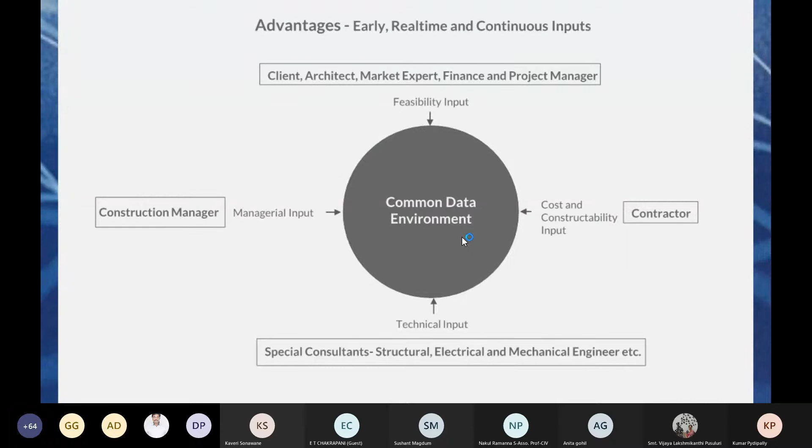Every minute is very important, every hour is very important, and we have to go through this in a fast-paced society. Even construction has to catch up to this, and that's the reason you have everyone giving their inputs, and you have a better outcome of the construction.

So this is a kind of graphical representation of what we were talking about till now. In traditional workflow, you have the pre-design, schematic design, design development, and then construction documents which are prepared, then distributed to different stakeholders, and then you have different buyouts, which in turn starts the construction and closes out the whole project.

When compared to the BIM integrated approach, at the conceptual level you have all agencies right there helping each and every stakeholder, giving their inputs right at the design stage, where you have a criteria design, detailed design, so that even from the design stage, you have inputs from all stakeholders, and these are implemented in the design without any rework.

And then you have implementation documents rather than construction documents. You have shop drawings, or basically the ones which are used directly for fabrication and brought into the site. We can go to that extent and use this to the fullest, and then you have less time spent explaining the project to different stakeholders, and construction is done very quickly because everyone knows what happened during the design phase, and it is being closed out very quickly.

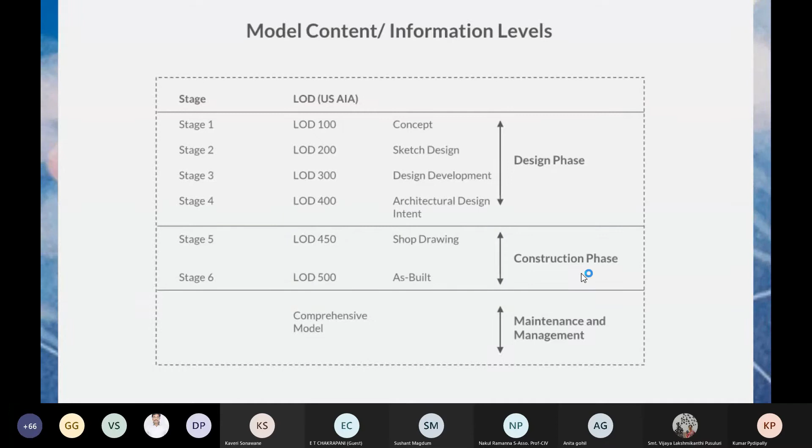So we did a project in Hyderabad. This is done in ArchiCAD. It's a duplex house with a pitched roof, but apart from the design, we took that ArchiCAD model into Revit and added MEP services. This design was also for a structural engineer, so he gave his inputs as well. So this was a totally coordinated model which we did.

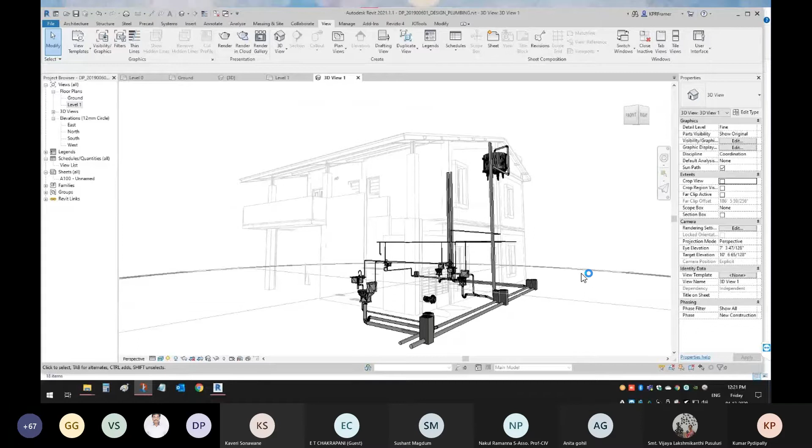And the construction for that was very quick. So what we do, when we get a project, as soon as we get it, the first thing we do is add a project site location.

What this does for a model is, in many tools like Revit, ArchiCAD, or Bentley, as soon as you give a location, the software in the backend gets the weather data information of that location, and then you can start doing solar analysis and energy analysis just from the basic site location information.

And the best part is, once you create the model, it also has embedded latitude and longitude information. So everyone knows with GPS tracking which element goes to which part of the building, and it's easier now, apart from using grid locations at the site, to directly use GPS to track where each constructional element goes.

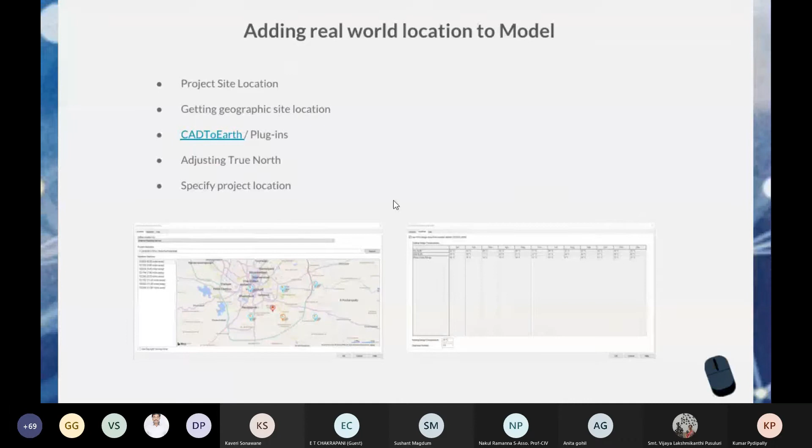So there is no longer a need for creating mass models just to explain neighboring site situations for the designer. Once you have all this information, you of course have to give the true north and specify the project location perfectly, and then you have a model which can give a correct, detailed analysis.

So I want to take a step back and explain this data in a BIM model. What we did here is take a 10 feet by 10 feet wall, 6-inch wall, which is modeled in 3 different software.

This is from AutoCAD. The one which is being selected, which is in blue now, is from AutoCAD. The one to the left is from SketchUp, and one more to the left, the last one, is Revit.

So we are using the Navisworks interface to see what information is embedded in it. Basically, this is the CAD model. You can see the CAD wall drawing file, and as soon as I select it, it shows it's a 3D solid. But in the properties, I just have three different tabs, which give different information about that specific element created in CAD. You can see it tells me which layer it's in, what the file name is, and what the material is.

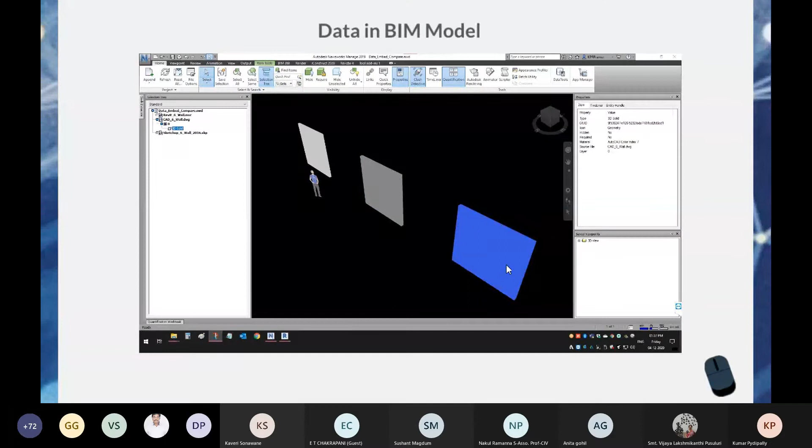Then we have SketchUp. The whole concept of SketchUp is that it does modeling using surfaces, right? So if you compare this to how an AutoCAD file is being selected, the whole object is selected, whereas when we click on the SketchUp one, it just selects one surface, and that's how SketchUp models it.

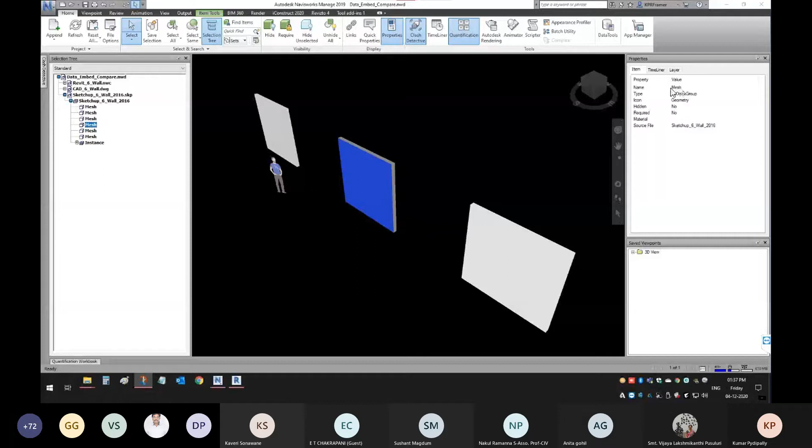Even in the selection tree on the left, you can see that SketchUp has one 6-inch wall, which is made up of 6 meshes because of the 6 faces, and each face is embedded with this information. So it just tells the source file name, and it says it is a geometry of mesh type, and that's pretty much the information we are gathering from just the SketchUp file.

So what we did is just use the native software and created these models. That's all we did. Now we are talking about Revit.

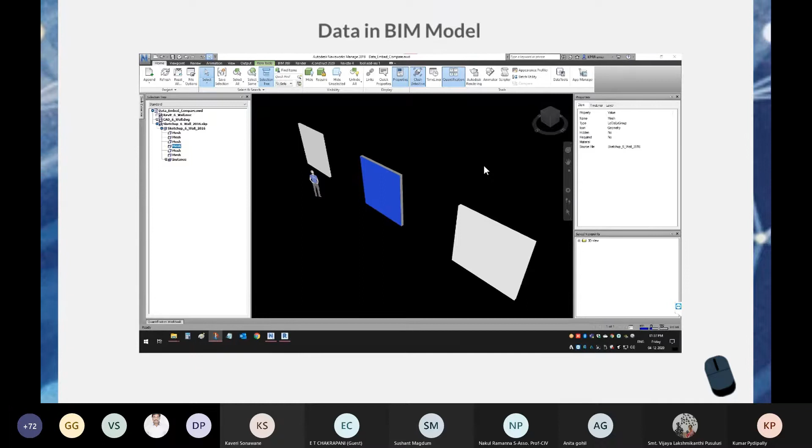Just by using basic Revit, we created this. Do you remember those 3 walls? These are those same 3 walls, but the properties extracted from a single element span many tabs, and it actually goes on further. So I just wanted to show the element properties which it gathered.

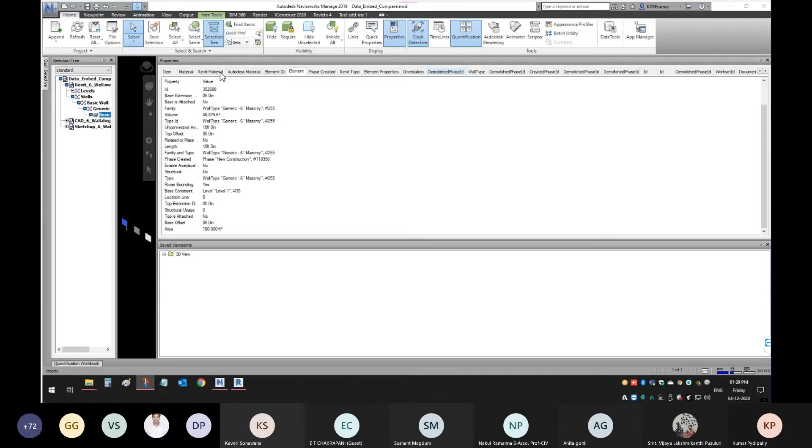Even in the selection tree, it shows it is a wall of generic type, a basic wall. But in properties, you can see it showing the wall type, the volume it has, and that the unconnected height is 10 feet.

Its length is 10 feet. It is at level 1, telling which level it is on. It is telling the area of it. It is telling if it has a base offset.

So you can understand the amount of information or data which is embedded in one small wall. It is just a wall which was drawn, and we just saved it. We did not do anything else, and this is all the information it embeds in that model. So you see how a small wall has so much information.

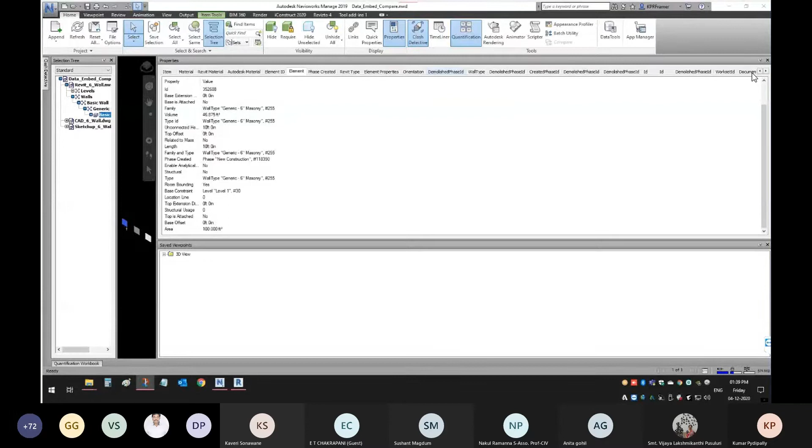Then you can take it further and understand how much information can be embedded in a BIM model for different elements in construction. Apart from just a wall, each and every element will have all this information, specific for its construction. That's why we say a BIM model is successful when, just using the model, not even the drawings, it can be constructed on site.

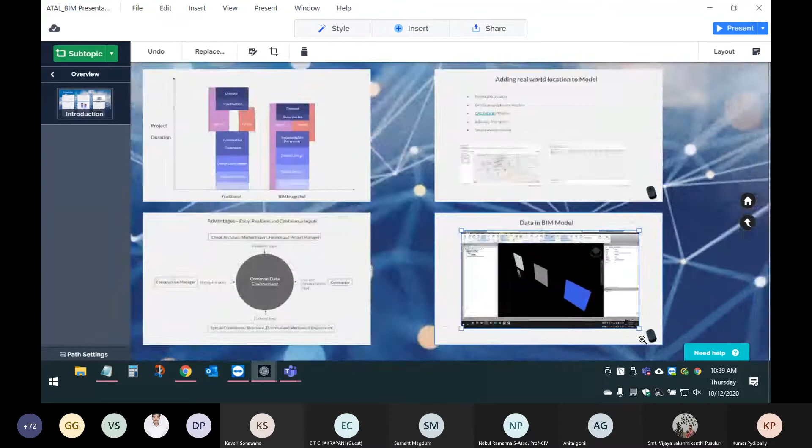We have a small video which was done by one of our students, which gives a clear picture of what BIM is. So I'm just going to show that now.

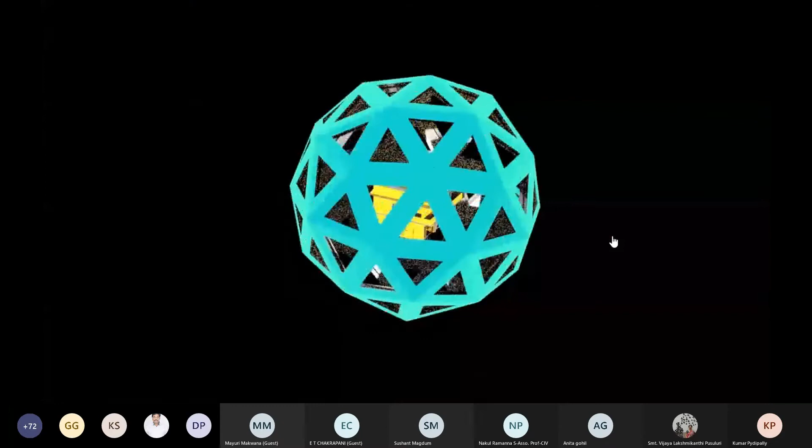There was a loop in the audio, that's why I had to mute myself. I don't know if you got the audio from the video which was shown, but can someone confirm if you could hear anything while the visual was going on?

There was no music or anything playing, but the video was fine. Oh okay, well I thought everyone was able to hear the audio. Okay, I will share the video. There is a YouTube link, I'll share the audio for that.

But basically, it explains what we discussed till now, where you have different consultants giving their inputs to the design, and different stakeholders cross-checking what was being decided, and finally you have an outcome of that.

So my presentation will be jumping between the PPT as well as the hands-on session, so that you can see whatever I've been talking about. I want to jump to a screen which basically shows the data embedded in a different file. So I'm just going to start up Navisworks.

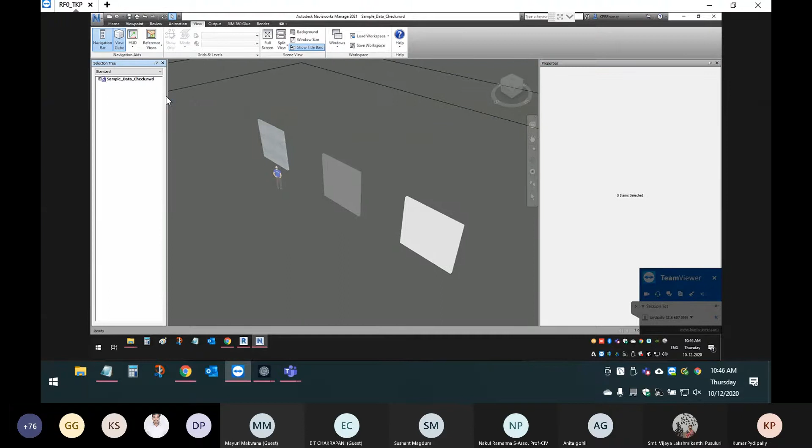So as soon as I select the file from AutoCAD, you see it is showing me what is being selected, and these are all the other tabs of information which it is basically giving out, which I showed in the presentation.

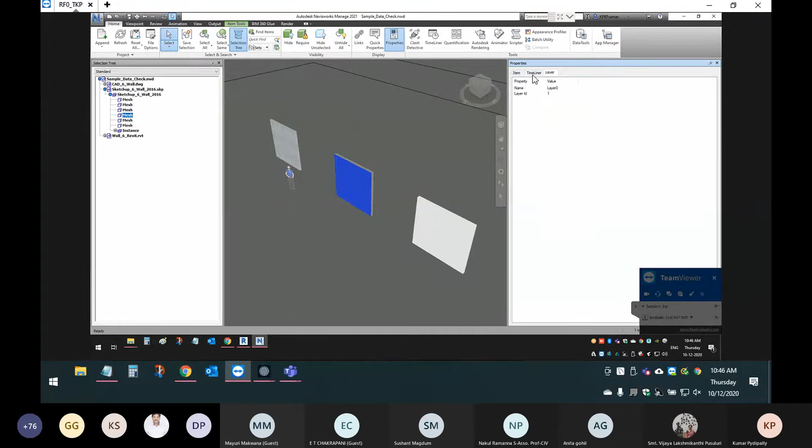The next one is from SketchUp. You have the same mesh, but apart from that, this is the information which is coming out from the native SketchUp file. And then we have Revit.

So as I was showing in the presentation, okay one second, let me just reset it. Okay, so you see from this, you have all this information which is embedded in just a simple wall.

Apart from the element which I already showed in the presentation, I just wanted to go over what all other tab information it has embedded in it.

So it has the element ID, it has the Autodesk material which is being applied, masonry, CMU material. Then we have what kind of Revit material is being applied on this, all the different properties of that.

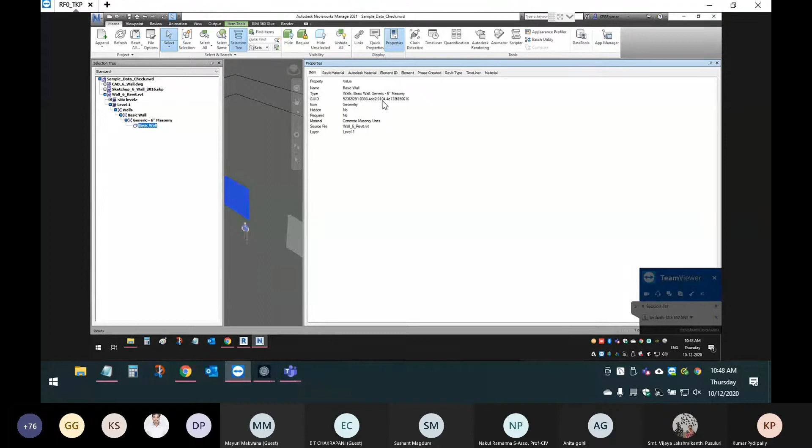You have item properties, what wall it is, what is the globally unique identifier. This is all to select it uniquely.

Then we have phase created. So Revit has different phases. So if it is like a demolition phase or a new construction or a renovation, those kind of things, it also has that information in it.

Then what are the type parameters which are there in that specific wall, and if we have added any timelines, you can also see that information. And finally the material again.

So you see just a simple wall from Revit has this much information embedded in it compared to the other software. So definitely it adds more value, but at the same time it also equals how much investment you're putting to get that software, right?

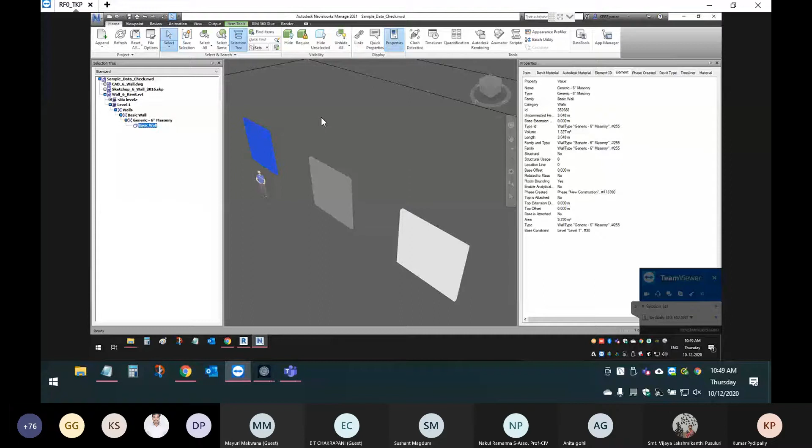So not all stakeholders can get their hands on these softwares, or they have a cheaper alternative. That's when you have the interoperability option, which started off in BIM, where different stakeholders can work in their native tools and then send that information.

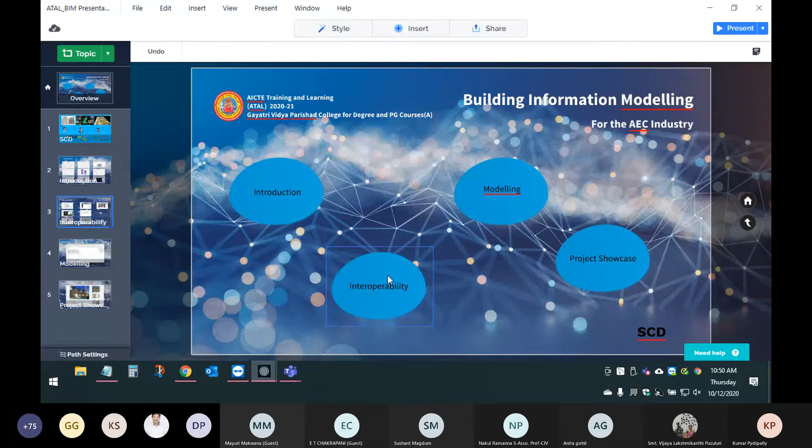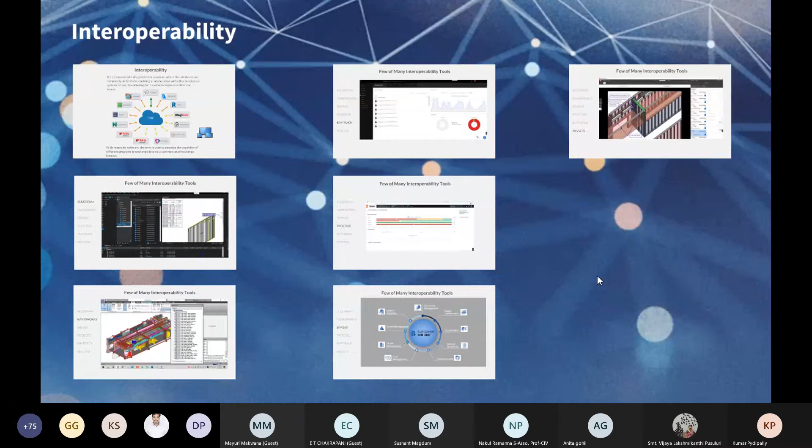So that it is hosted on a single server which everyone can see. I'll come back to the presentation. Interoperability - what this term basically means is what I just explained. So everyone can work in their own environment, whichever they are used to, and host these files onto a common data environment where collaboration is very easy.

And irrespective of which screen you're seeing it from, be it Mac, PC, phone, tablet, it gives the same functionality for everyone, where all can interact and give their inputs then and there, and you can get this whole information exchange in this environment. There are different tools which have these features.

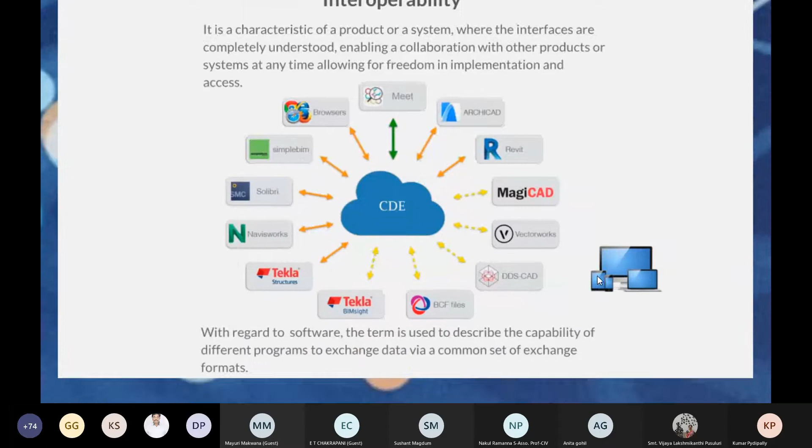I'll be showing a few which we are using in-house, and we have been using in our company. So the first one I'll be showing is Bluebeam.

Bluebeam by itself is basically like a PDF viewer, Bluebeam Review - that's the name of the software. But it is developed for the construction industry, because most of our files are really huge, and the time it takes to open these files takes a lot of time, and you don't want to waste time.

So this software, even though Adobe is the conventional software which actually created PDFs, what we saw when we were using this is it is much faster when we use Bluebeam by itself just to open PDFs.

Apart from just the PDF functionality, it has something called Studio, Bluebeam Studio, which is a repository of all the PDFs at one location where everyone can access and give their inputs in real time, and the said person will get a notification that so and so has been changed or some comment has been added.

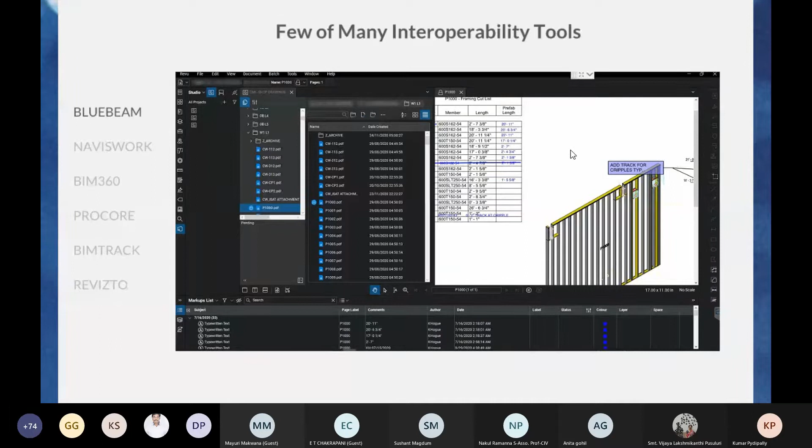So let me just pull that up in my system.

So it was offline as soon as I opened it, that's why you had that big logo of Studio. But I just clicked over here when it became online, so it just logged in as my user. And these are the two... let's see, yeah, these are the two projects which are going on currently.

Actually, MPK 21 is already done, but we still have access to those files. Basically, this is like a centralized location for everyone to upload PDFs, a 2D interoperability where everyone has their drawings at one location and everyone knows if there's an RFI or anything changed.

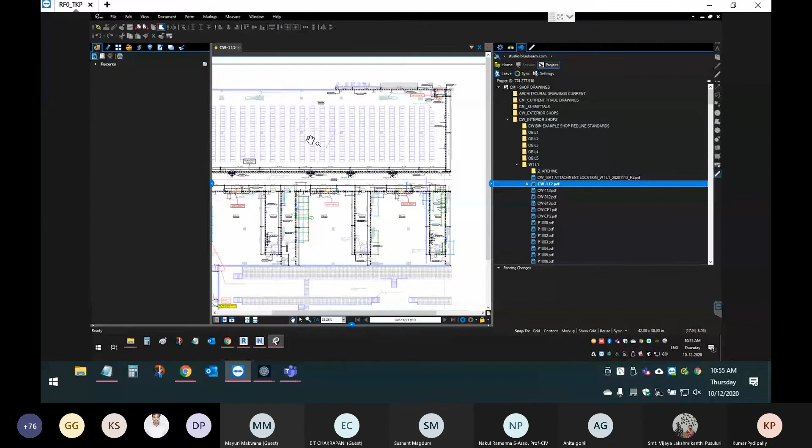So let me just open any one file, doesn't matter which. So this is a project, we will be talking about this when we are doing project overview. But so this is the plan, and we are the drywall consultants for this project, so we have to make sure all walls have been built correctly.

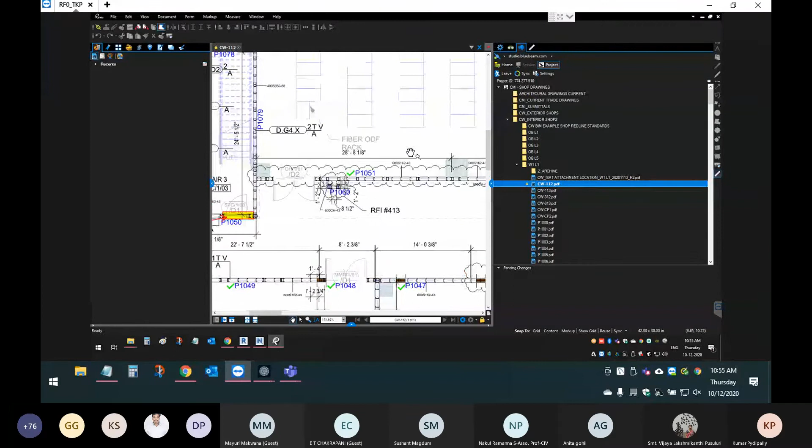Since this is metal stud construction, what we do is we populate all metal studs for each wall according to the openings or the heights of these walls. We create openings, we have jambs, headers for the openings. So each wall, apart from showing its location in the floor plan key plan like this, we do have its panel elevation. That specific wall will look like this inside with all the studs.

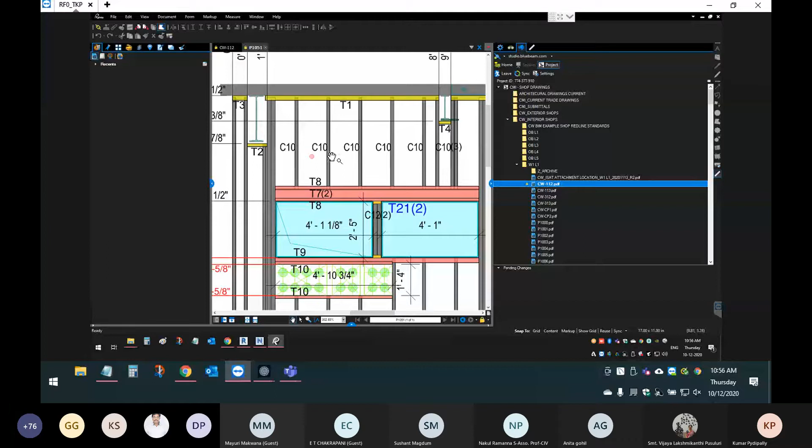So you see there are specific tags for each stud. Each stud, and inside the field, the manager will have iPads, and all they need to do is just click and they can come to this screen. They have QR codes where they can scan this in their phone and get this. The way it is being done on site right now is they have this panel, so-and-so panel is at that location according to the key plan. As soon as they get that number, they just scan this to get the quantities.

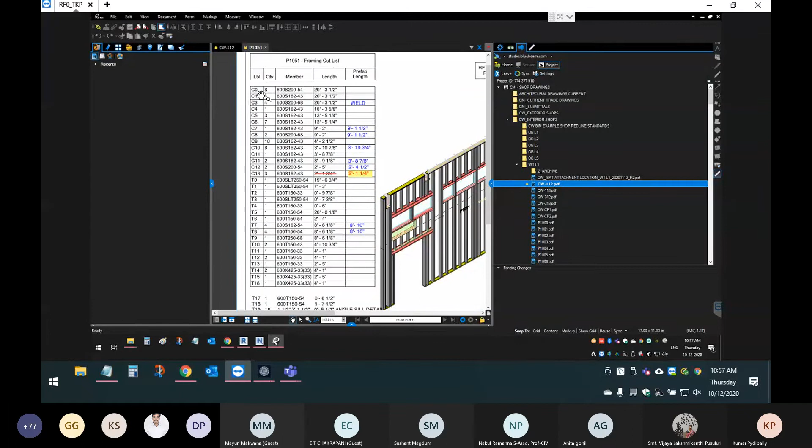You see all these are extracted directly from the model, and they get all C0s which are of type 8, this type of stud, has this much length. So they know exactly what is the quantity required to build this whole wall.

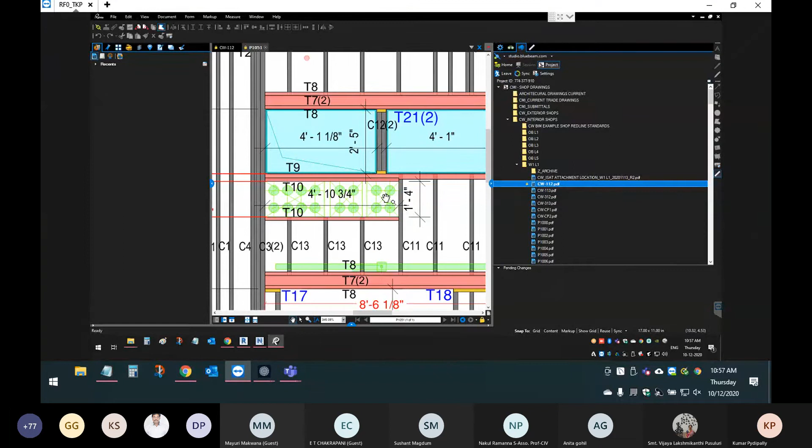They also know what are the openings. So if you see, all the trade files have been grayed out, and this is a duct, this is a cable tray or a pipe which is going through there. There is a light right above the door. Then we have different ducts going through the whole wall at that location. You have different other wall-hosted trades at that location.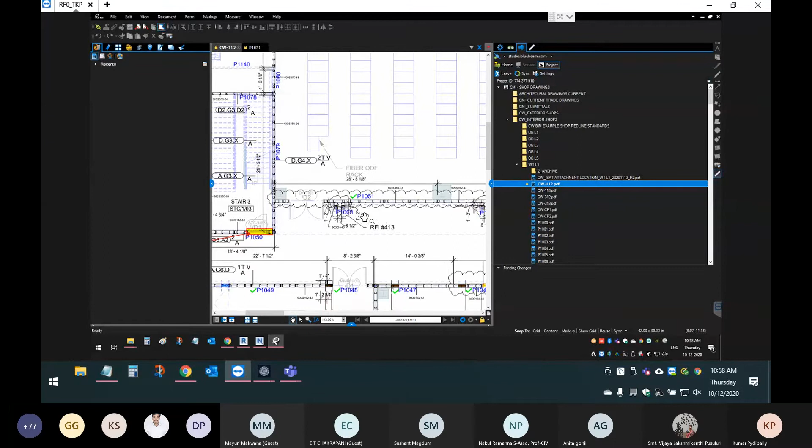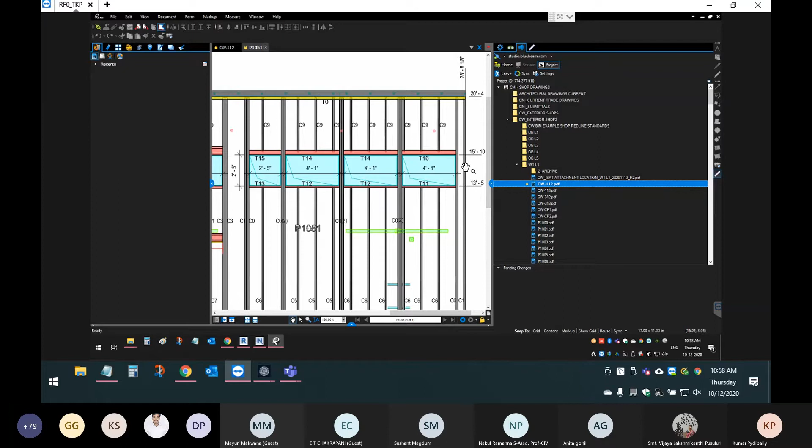So pretty much just by seeing these on their iPads, the field knows what's happening and why things are happening the way they are. They can correlate, and if there is any discrepancy between the locations of the said trade, they can mark it up, and then we can update the model then and there. Also, they can just make a mark and send it to the trade, so the trade also knows what's happening on site as they are building, right?

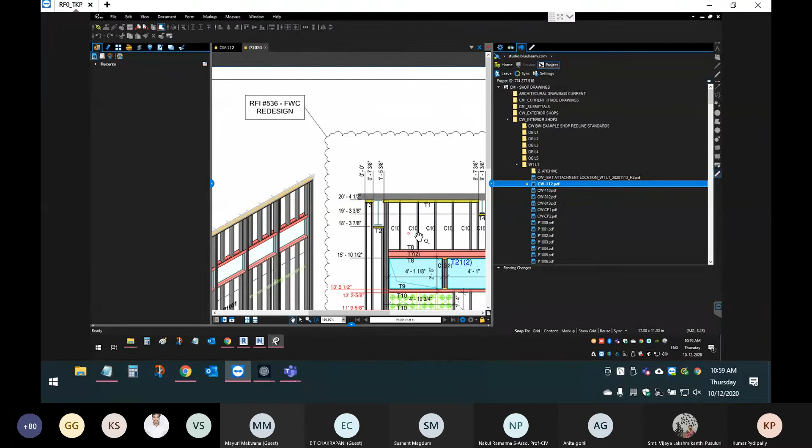So this is like a repository of 2D information, but what takes it further is your ability to add what has been affecting this specific panel. So what happened was, in this project, you have a corridor wall. Let me just jump back to the floor plan. So we have a corridor wall, and for some unknown reason, the cable tray could not be hung from the slab.

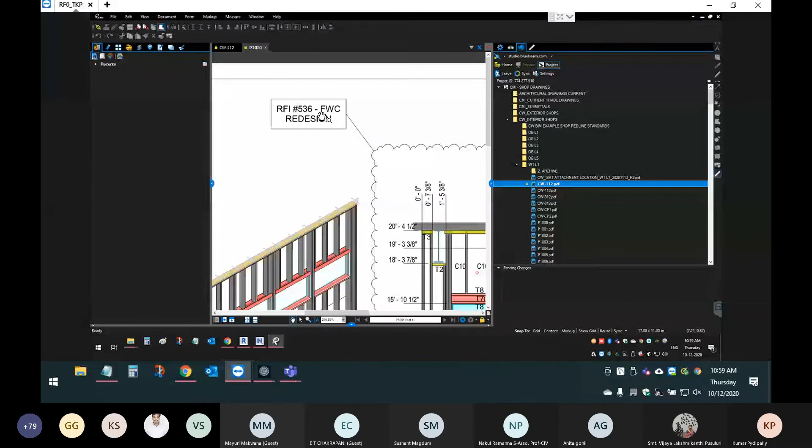So what they wanted to do is host it from the wall. So suddenly this wall had to be beefed up to take that load, right? So there is an RFI which states that, so we know this specific RFI to refer to when they are constructing this, and these are all real time.

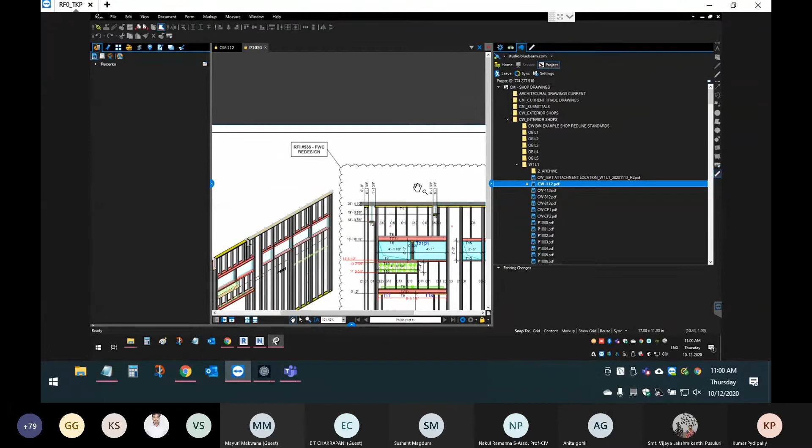As we update the model and then upload it, they have the latest file. The field has the latest file within an hour from what we do. So as soon as we print and upload, they have the latest information, and it is being reflected on site for the field manager to work on. So, very informative, very good use of 2D repository for getting interoperability between different trades.

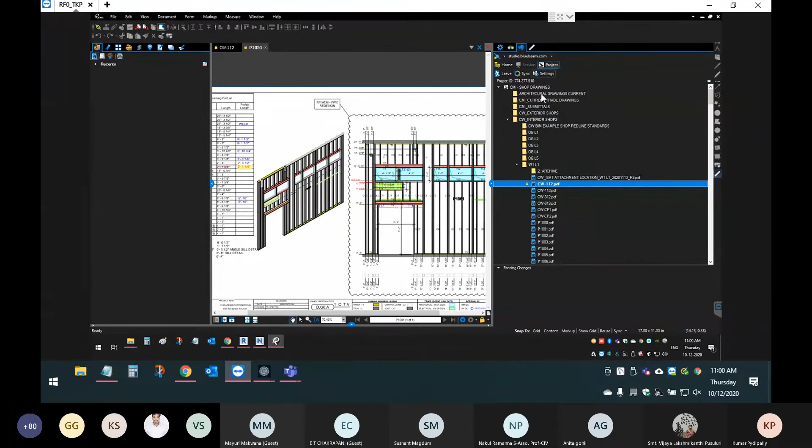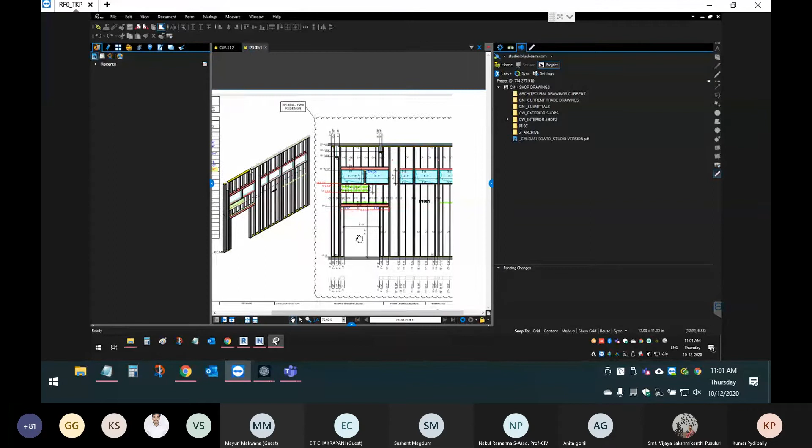Of course, I'm just showing you what we did. There are different trade elements which we might have access to or not, it all depends on how much access has been given to us. So I will basically show what I can show, or what I'm allowed to show. Since this is our work, I can show this specific thing. So this is basically the 2D interoperability, you can say. I'll just close these.

Okay, then we have Navisworks. This has been widely used for clash detection and simulating the construction of how it is being done. As I said previously, Navisworks does a good job where it can bring in all the different models and overlap them and show the construction issues.

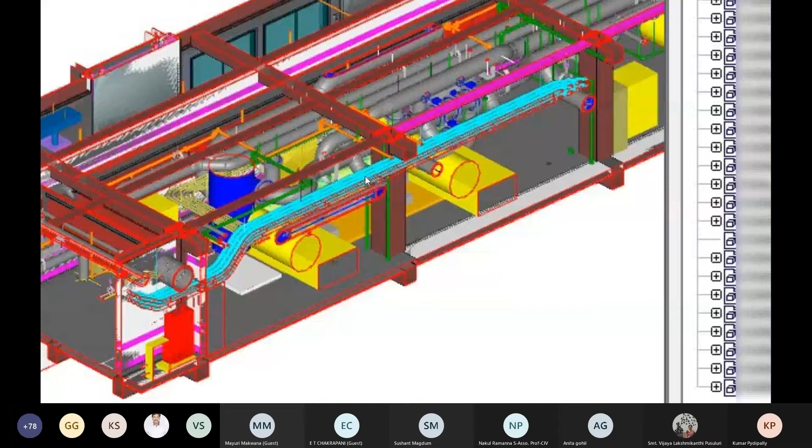And we can do the clash detection, where we can check the constructability. Each and every trade has an idea of what is happening. For example, the routing of pipes can be done beforehand, when they know what is being obstructed in their path, to reroute their overall route. So each and every trade has this information as soon as they start modeling, and we have these coordination meetings which are being conducted by the general contractor.

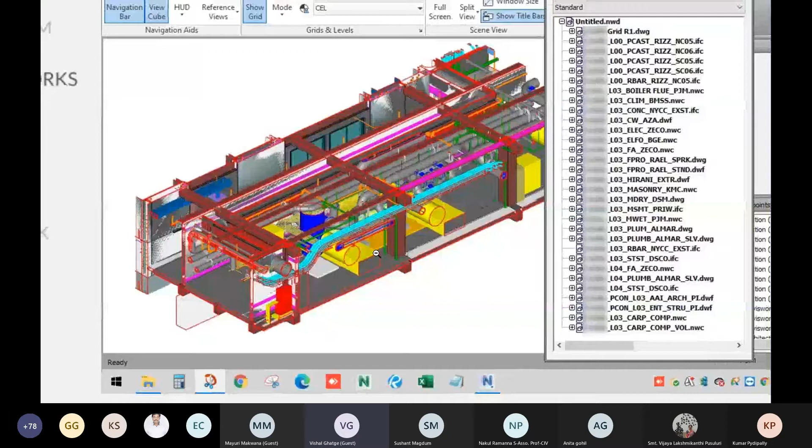Hello. Yes, sir, I have one question regarding Navisworks. While doing a clash detection test, among all the services, what is the sequence that clash detection should be? Means what was the sequence? If first one is the HVAC system, firefighting or something, I want that sequence, sir.

Priority, it's a good question. Yeah, sorry, it's a good question.

So the way it is being handled in our projects is we usually have a general contractor who does all the clashes between different trades. It is mostly like a cross product, so each and every trade's model is being clashed with all other models. So there is no set rule like first mechanical file is being clashed with all others, then structural.

Of course, in construction, I would say structural model will go first. Apart from the architect's design, you have the structural being the foremost for the building to stand. So usually structural clashes will be done first. Then it is done, actually not in a sequence, because everyone's model has its own importance.

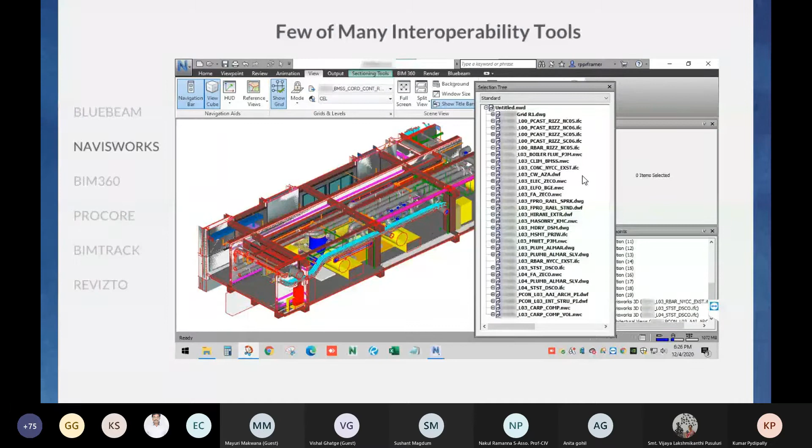Navisworks brings in all the different file types together and displays what's happening virtually on site. Usually these clash detections are done six months prior to construction, so when it's being built on site, everyone knows exactly what happens and follows that, minimizing time spent on field so they can focus on getting construction done within the given timeline. You know exactly where what clash is happening, so you can focus on construction rather than getting surprised by, say, a beam with more depth than shown in the drawings, which would cause rerouting and a big lag in the timeline. Those are all cut down.

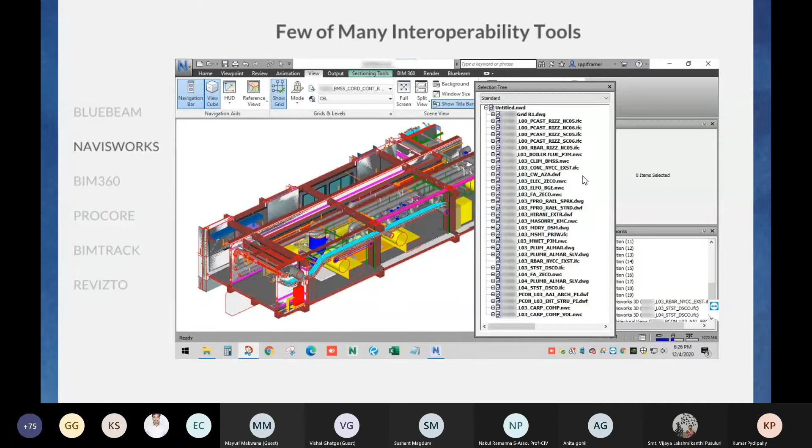I'm going to jump to a view in Navisworks where I want to show a similar instance of how we use it. One thing I do want to mention: Bluebeam, which I showed previously, is a server or cloud hosted thing. Currently Bluebeam is available only on iOS, not yet developed for Android, but it can be accessed via iPhone or your systems, and through any browser. If you have a browser, you can just open these files and check what's happening.

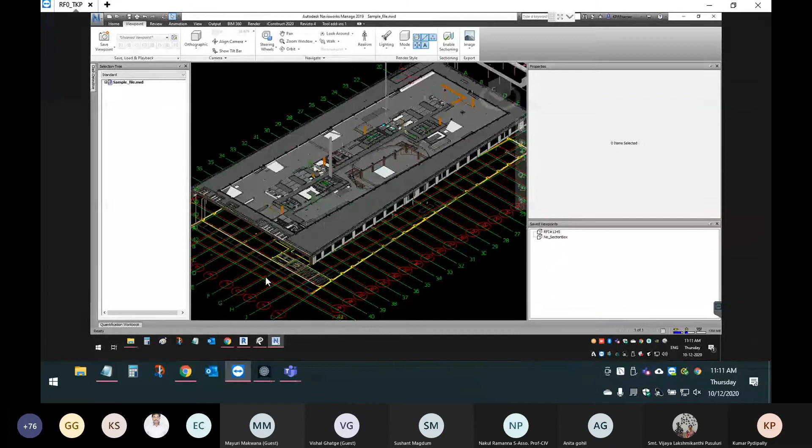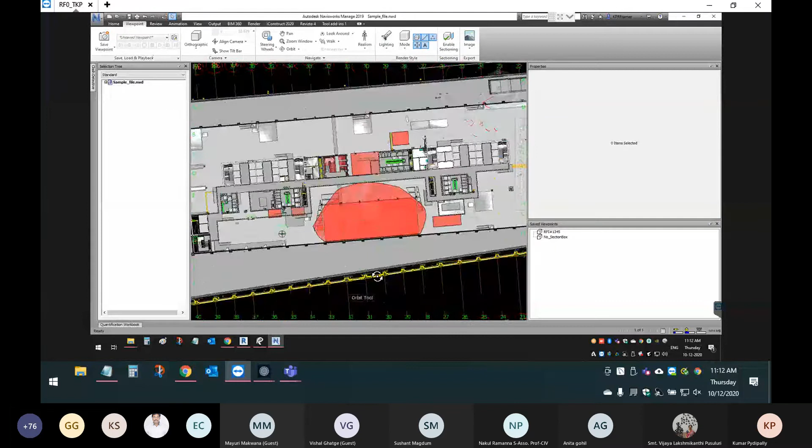Let me show you a sample Navisworks file. This has all these files embedded in it, and this is one level of a project we're currently working on. We have the grids, which are overlapped from an AutoCAD file and brought in, so at least you're not lost while roaming around in the model. In Navisworks we have these viewpoints, so if you want to talk about a specific issue and go directly to that location, you can create a viewpoint and discuss what's happening.

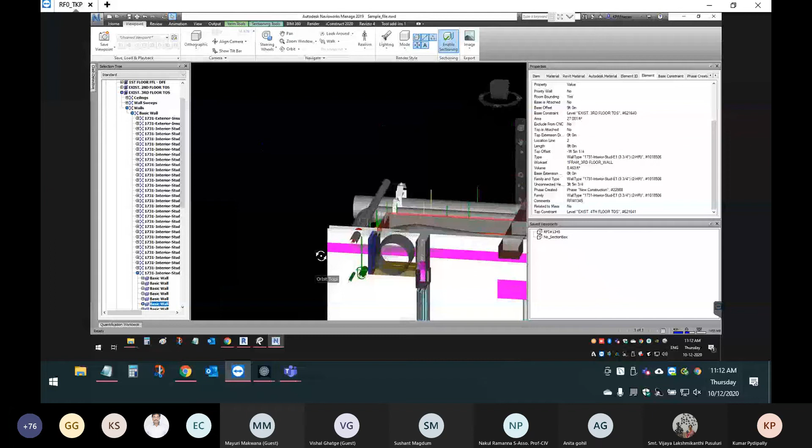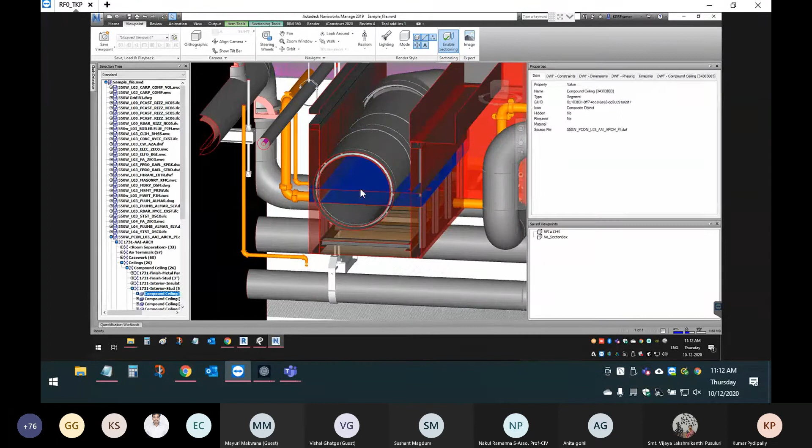I wanted to show this specific instance where you have a rated duct work going through, and because it's rated, we're also encasing it with a rated wall along its location. This was the architect's intent - the pipe was meant to be enclosed within this space, but because of the depth or the slopes, it had to go down, and we had to reroute it and restructure the enclosure accordingly. So this is the architect's model, and this is our updated model.

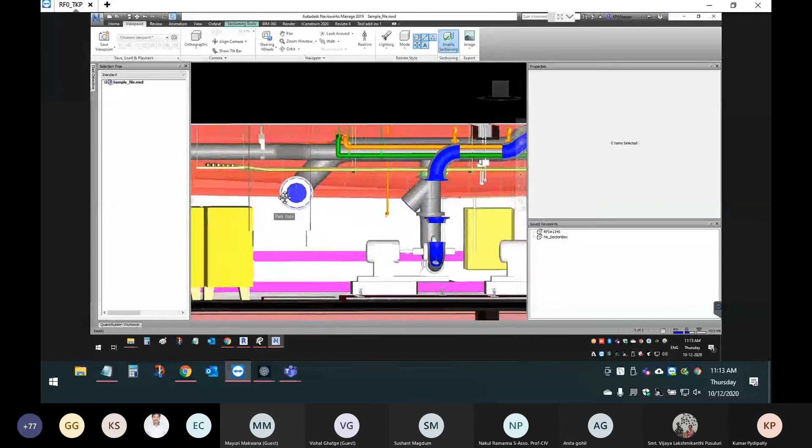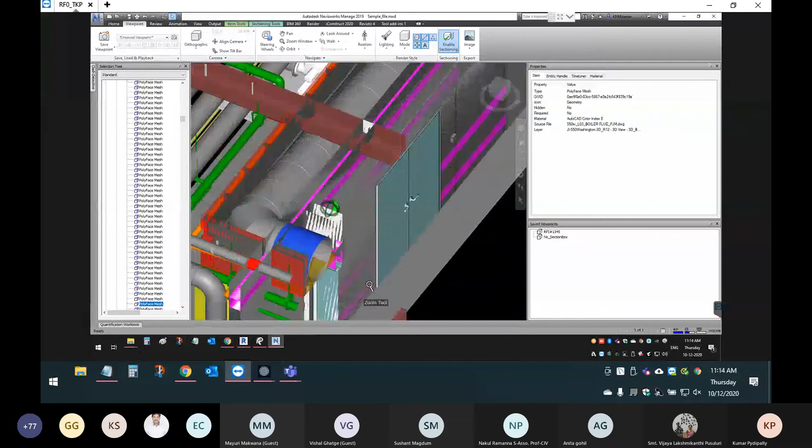This is due to this RFI, so you see all the different trades that are there. This specific pipe - you can see the transparency - basically slopes down and then back up and goes to the other side. So we model while doing this to know where we need to enclose it and where we need to dip the enclosure. Of course this is not yet updated.

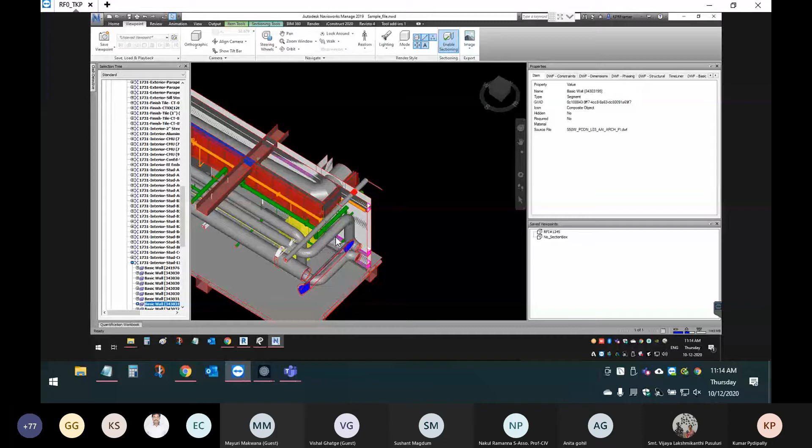This side we're still working on, doing sign off, but the other side we did work on. There are dates where a few rooms have to be finalized - those are called sign-offs in these coordination meetings. So in a few places everyone has to populate at the right location, and once everyone is sure where they're going, that's when the GC or whoever's in charge calls it signed off.

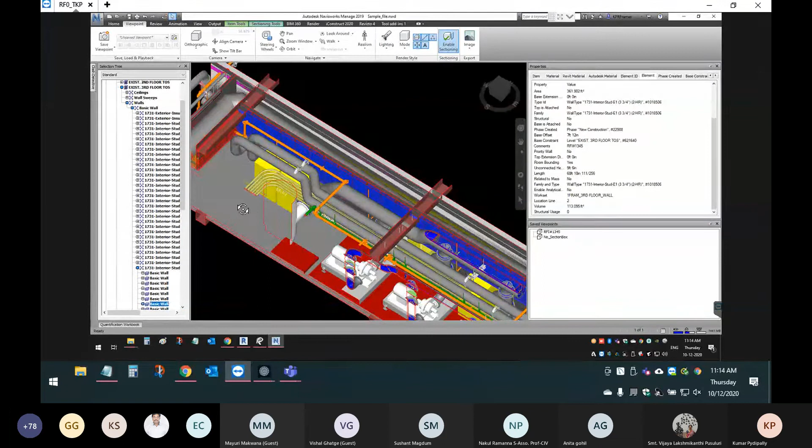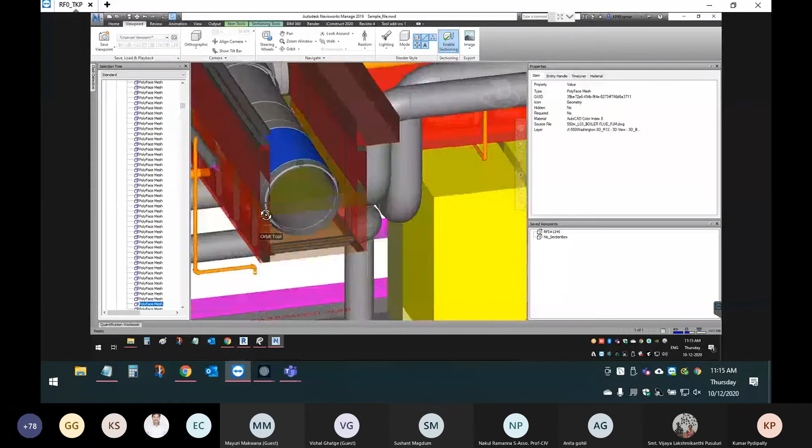What happens during sign off is that whoever's model is at a location, it's understood they will be constructing on site per the location shown in the model. So say currently the pipe is showing in clash with this wall - what if this has been signed off, and let's say the pipe is installed correctly, but the wall maybe they did not yet install, right?

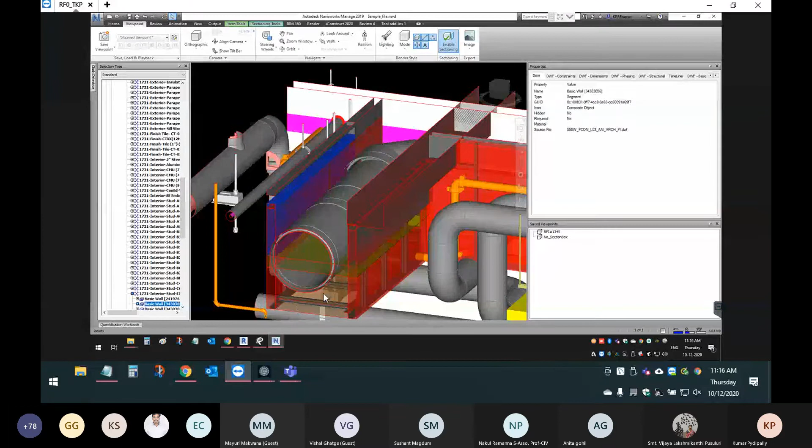So what happens is, if this is signed off, it's on the wall subcontractor to take care of this whole thing - it's all under his belt, so he has to take care of the costs and everything. So it's very important that before sign off, every model is updated perfectly and everyone is on the same page. If someone is delayed or there's an RFI pending, there will be a note so that once that RFI is resolved, they'll revisit that specific area. But pretty much that's how a specific task or room gets signed off and updated.

So this basically shows an overall view of this. Let me just enable sectioning - I'll switch it on.

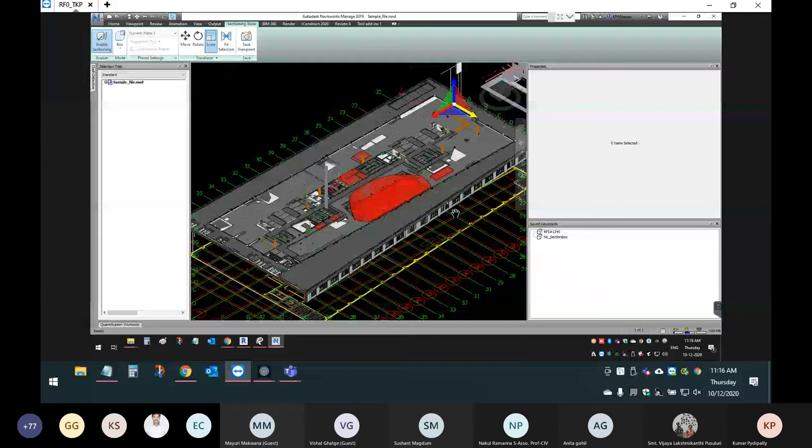Okay, I'm just expanding so that we can see a little more.

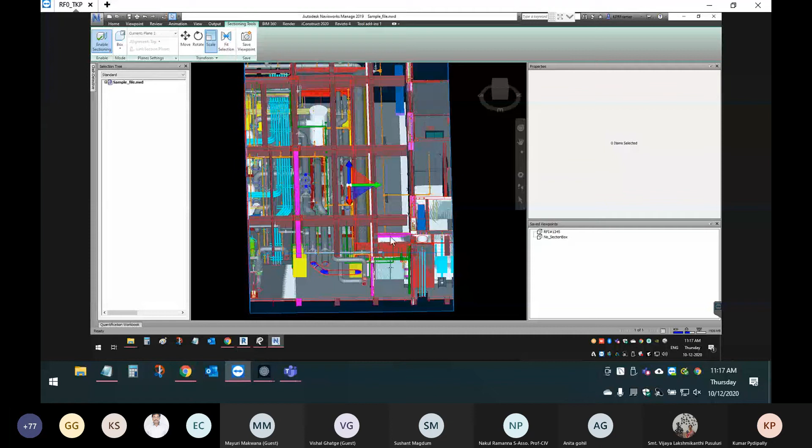So basically it has all these different models, so we can isolate a specific model, let's say...

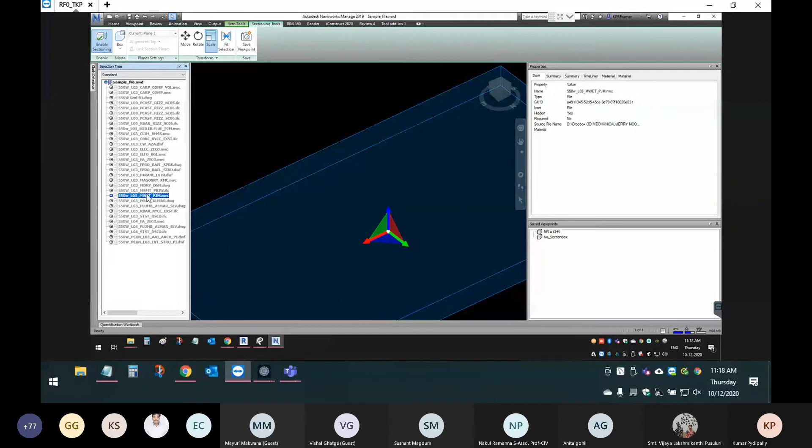So this is all from mechanical, I guess, and this is all the model. So each file has the specific stakeholder's information, and once it is collectively brought in, we run clashes through this, and we have a coordination meeting accordingly.

So even though it is a single software, let's see what file types it can open. The first three are Navis, it can open 3D Studio Max, it can even open CATIA, Microstation files, DWF Autodesk, IFC files, Inventor files, Pro Engineer (Pro E) files, Revit, Rhino, SketchUp files.

So pretty much any 3D modeling software it will try to open. There could be a few limitations, but as far as I know, Navisworks usually opens any 3D model. But even if it can't, you have IFC or FBX, where specific software can export to these file types and it can be opened.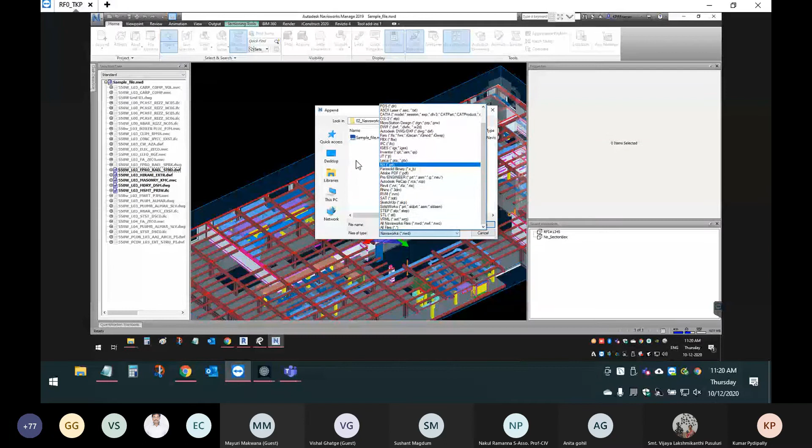The thing about this interface overall is that everyone has to submit their model at a single location, and there should be someone who is actually bringing them together and conducting the meeting. So in these big room meetings, you need someone handling this software while the meeting is going on, and that person will be conducting these meetings.

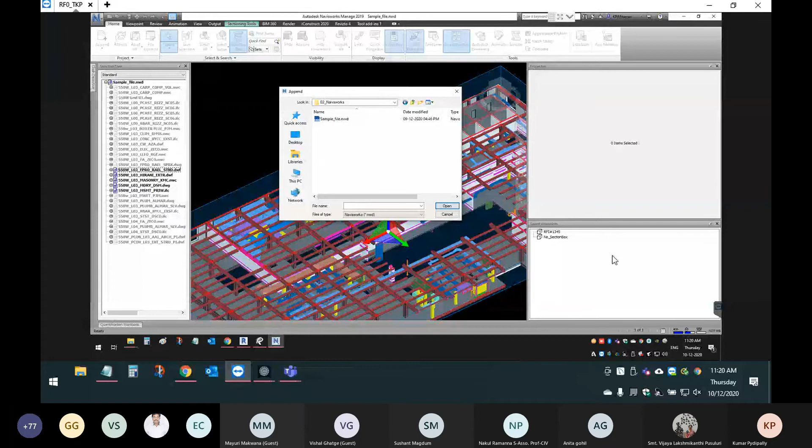So it is pretty much like you have a centralized location where you are uploading, like a Dropbox or a Google Drive or any cloud server, from where the models are being brought into one location, and it is being appended to the Navisworks file, and you are seeing all these.

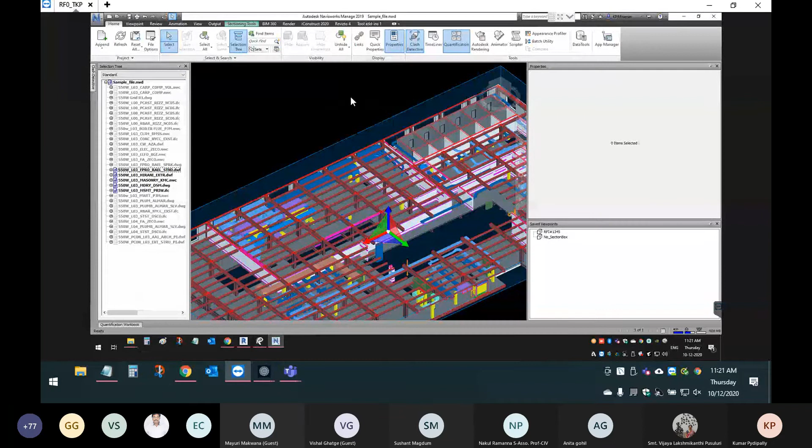But the challenge is if you don't have a server at that location. Let's say you're in a trailer at the construction site and you don't have access to these file locations, then what's the situation?

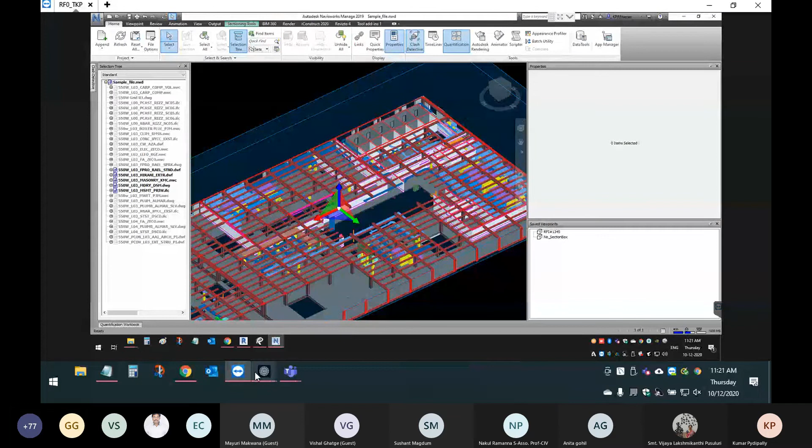So Navisworks is pretty much almost like an offline interoperability of 3D models, where they have to be brought into one location for it to be embedded into Navisworks, and then these clashes or studies are done.

So then we have this BIM 360, which is like an online cloud service, doing pretty much similar to what Navisworks does. You have an online server where everyone can upload their models, and that by itself has different tools where it can do clash detection automatically.

It can generate clashes and then send notifications to the specific stakeholder that these are the clashes and these are to be resolved by so and so date. So BIM 360 has quite a few parallels or verticals which tackle different things.

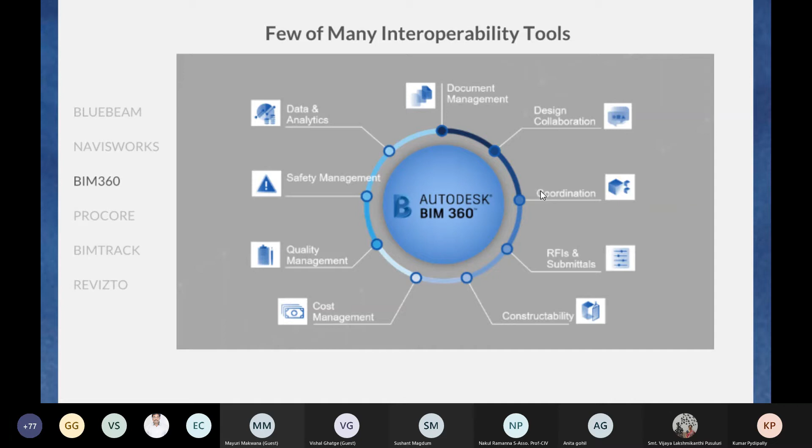So if you just go to their website, and you go to products, so you have all these, you see.

Similar to Bluebeam Studio, BIM 360 has BIM 360 Docs, where they have the CD set and all the document management software. Then you have Design, BIM 360 Design, where you have design collaboration and work sharing. You have Ops, which does facility management from Autodesk BIM 360. You have BIM 360 Build, which does quality control, safety, and project management. You have BIM 360 Plan, you have Coordinate, you have Layout.

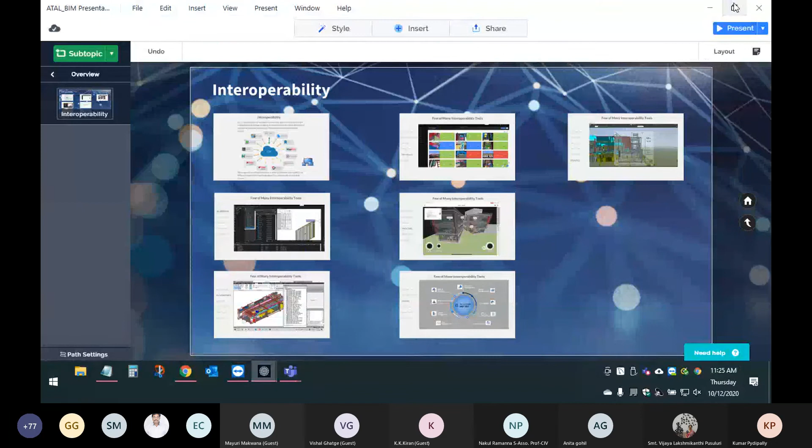So it is pretty much what Navisworks does offline, but it's an online service. So this is basically BIM 360 Glue, and the term 'glue' is just to glue our models into the server, into the BIM 360 server.